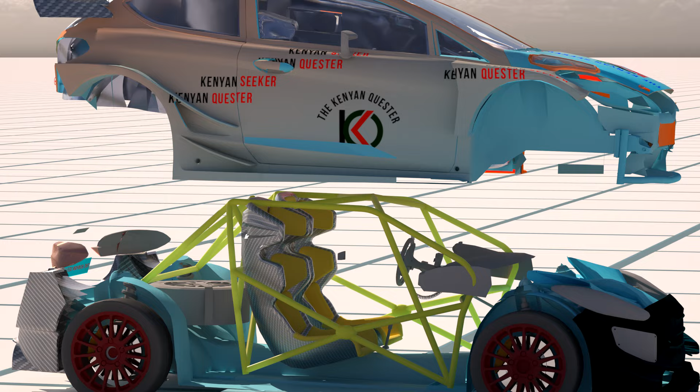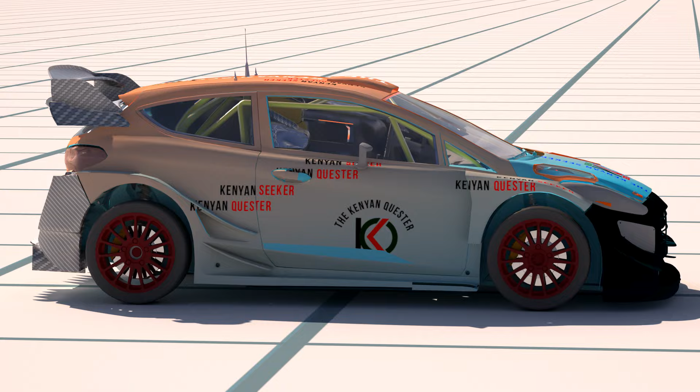Starting from the exterior, rally cars are adapted from normal cars on the road. For instance, Toyota's GR Yaris is based off of the Yaris platform. Interestingly, this similarity stops with the shell as all the other internals are swapped out with custom performance parts. Even so, the exterior is heavily modified for aerodynamics as per the WRC rules.

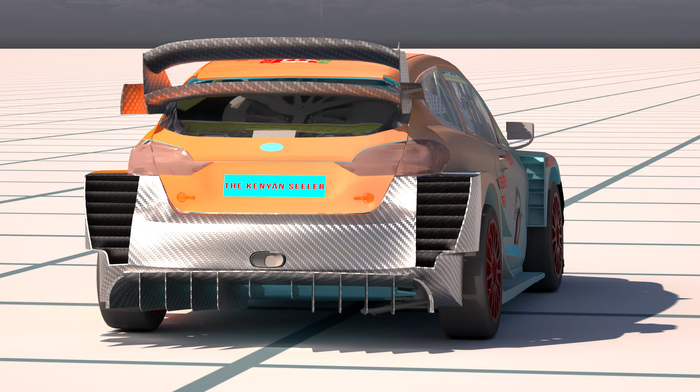The car's body panels snap together and can be easily bolted onto the chassis. Materials range from carbon fiber to aluminum. The chassis is made up of a space frame designed to provide maximum protection for the driver and the co-driver.

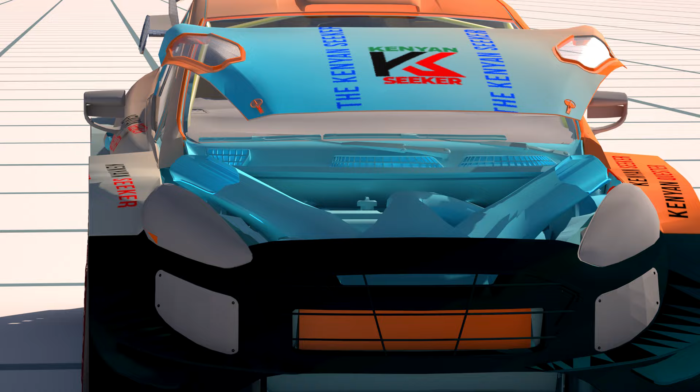Aerodynamic features include side skirts and a pronounced rear spoiler for downforce and stability, as well as air ducts for cooling various internal components. On the front, the cars have a splitter meant for creating downforce. On either side, they are fitted with dive planes that not only provide aggressive looks but also channel air along the side panels.

Note that in the new cars, there's just a single dive plane that attaches to the front bumper from the side. The wider wheel arches, side vents, and skirts help direct air from the front of the car, while also directing air away from the tires to reduce drag.

The new regulations discourage use of rear diffusers. Diffusers reduce turbulence caused by air flowing under the car by creating more downforce and traction on the rear wheels. As air flows over the car, the spoiler directs it accordingly to generate rear downforce. The WRC regulations dictate the shape and the size of the spoiler.

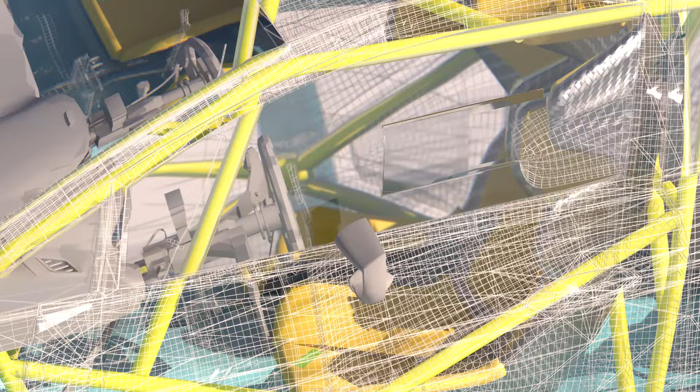In terms of safety, under the external frame is a rigid roll cage that creates a safety cell to protect the driver and his co-driver.

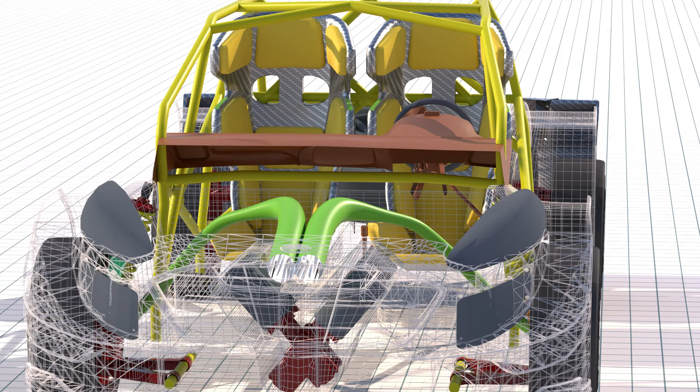Brake calipers: in a rally car, the braking system is a critical component for controlling speed during high-speed maneuvers. On tarmac surfaces, the engineers typically apply large brake discs measuring 366 mm by 24 mm with 6 grooves. These are mounted to aerospace-grade aluminum mounting bells at the front of the car.

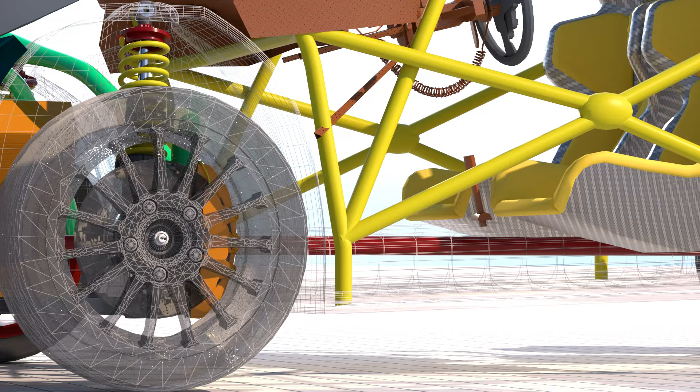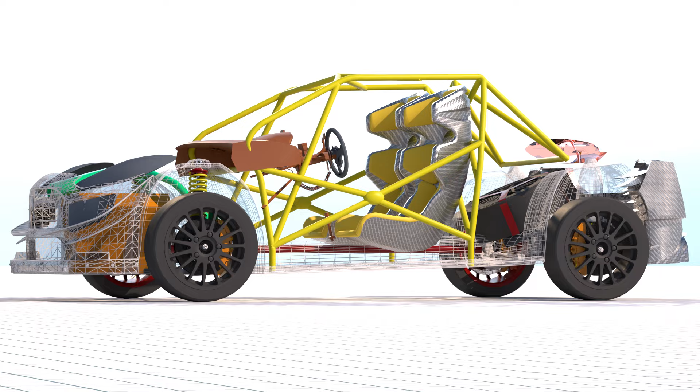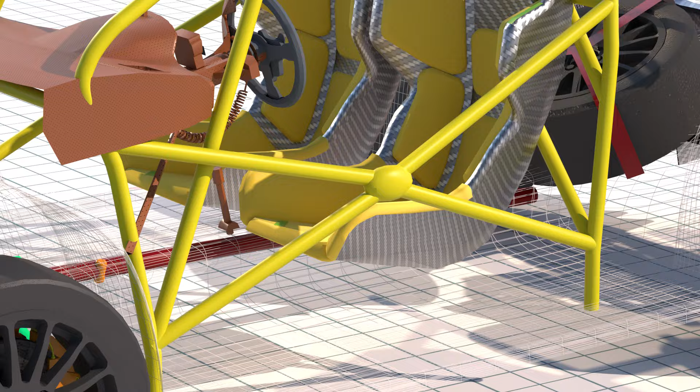Transmission and axle: the transmissions of rally cars feature a 4-wheel drive configuration with 5-speed gearboxes and a mechanical shift. Notably, in the new rally car, the active central differential has been removed. The suspension has been streamlined, allowing a reduced amount of damper travel. The transmission system plays a crucial role in transferring power from the engine to the wheels.

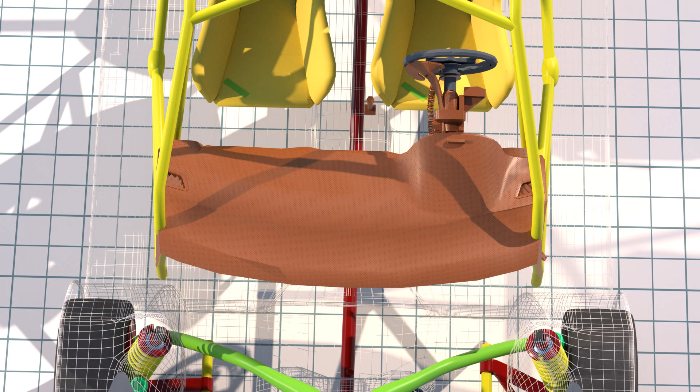Rally 1 cars use a sequential gearbox with 5 speeds. Unlike normal manual gearboxes, where you can shift gears in any order, a sequential gearbox requires sequential shifts, up or down. The driver operates the gear lever to select the next gear, which engages automatically.

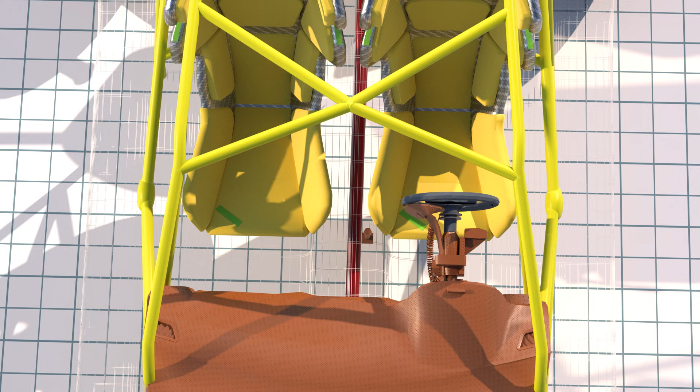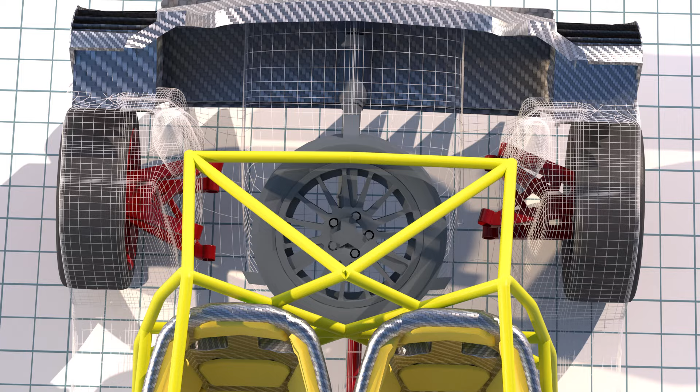The cars have both front and rear differentials which distribute power between the left and right wheels, allowing for optimal traction. The mechanical differentials adjust torque distribution based on wheel slip during acceleration and cornering. With the introduction of the hybrid system, the driver has to manage the ICE and electric power to avoid depleting the battery. If the battery runs low, they need to regenerate energy during road sections.

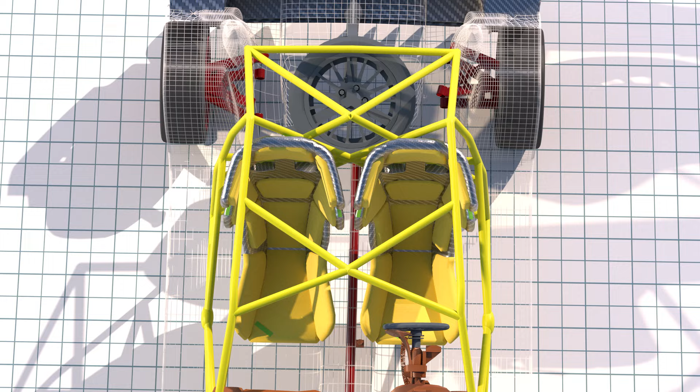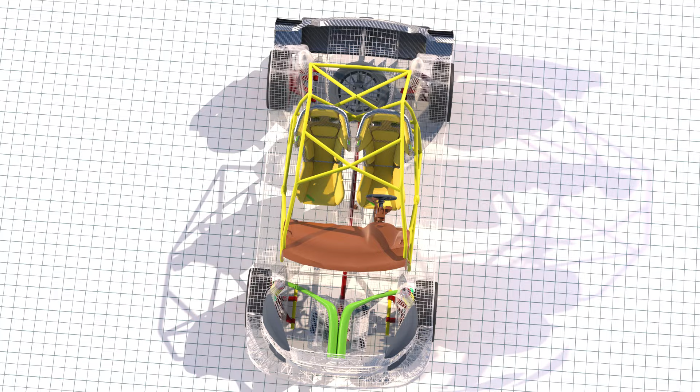Safety systems in rally cars are robust and meticulously designed. Aluminum tubes connect the rear bumper to the rear clip, forming a framework capable of absorbing strong impact. The roll cage serves as the driver's main protection. It is a robust structure made of tubular steel that surrounds the cockpit. It provides structural integrity and prevents the cabin from collapsing during impacts.

On the side, there are heavy steel anti-intrusion panels that protect the drivers from objects that might penetrate the vehicle from either side during a crash. The doors, front and rear bumpers are lined with thick, injection-molded foam blocks to improve the car's ability to absorb impacts from all directions during accidents.

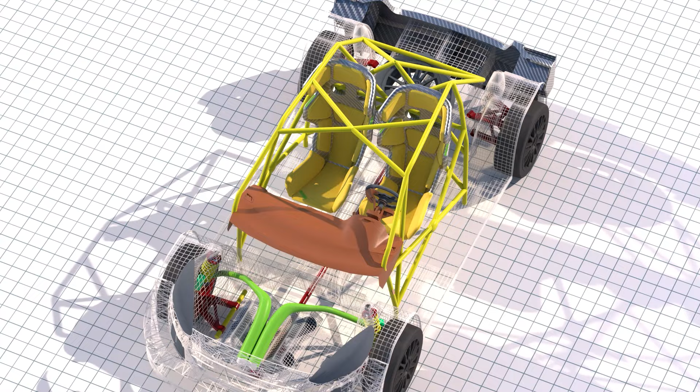The redesigned roof section can absorb up to 115% more energy compared to the previous design. The cars come with independent front and rear suspension, allowing each wheel to move individually depending on the terrain. The control arms are both connected directly to the chassis. The coil-over style adjustable shocks have dampers located inside the springs.